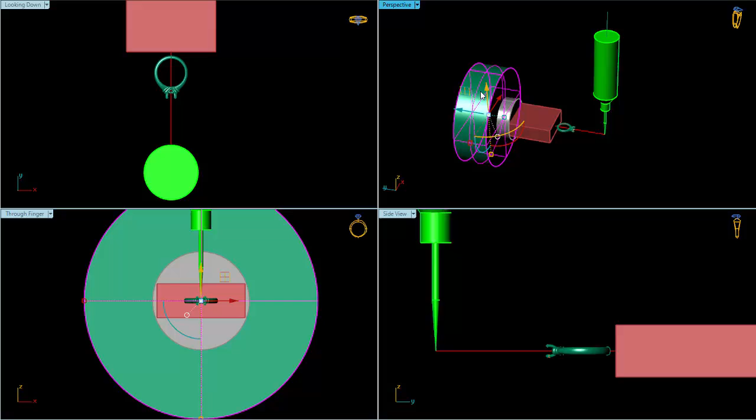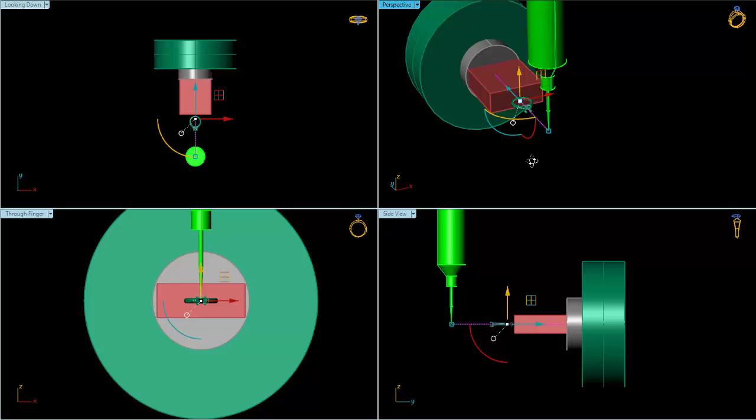Okay, so it's difficult to explain this in text in a post or without a visual aid. So if we say that that's the rotary table and we make some assumptions that it's 100% square to the bed, that it's centered over the cutter, if the cutter 0, X and Y is here, that it's centered and the offsets are lined up correctly. Alright, this being Z0 and Y0, and being sorted out properly.

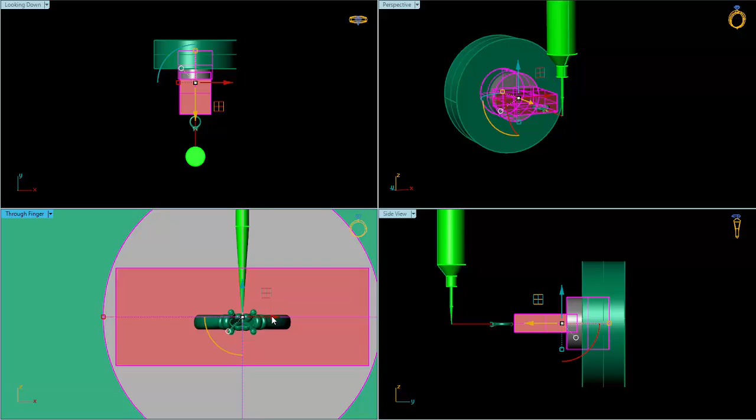Then this will always spin 100% true to itself no matter what. Okay, if that is true, then it doesn't really matter if your rotary teeth are not closing properly and this item is out by that much over there and that much over there, because if your Z is coming down to the same point each time, and we then grab both of these and we rotate them and we look at what happens to it in the flip, as long as the ring stays in the wax, the ring is still centered because the cutter is centered.

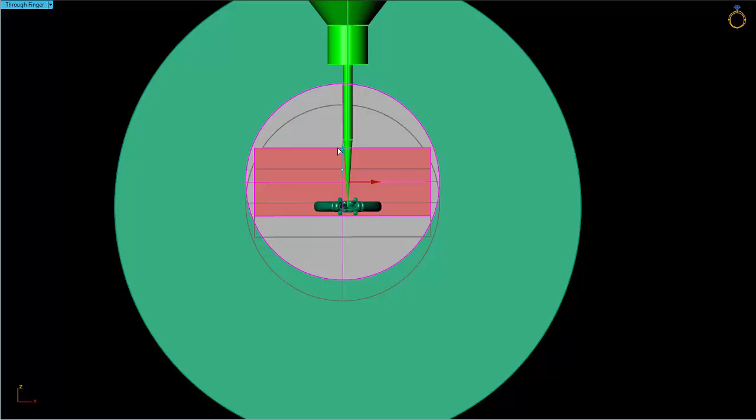Okay, so no matter what the offset is, you're still okay. You're still working within where you need to be. So in the flip, you're there. The only way for you to miss the flip is if this is so far out that you've gone out like 5, 6, 7 millimeters or more. So in this side you're making it, but when you're rolling, oops, sorry, got to roll the two together. When you're rolling, even in this case, you're making it. That's how far out you would have to be to miss it. The amount is extensive.

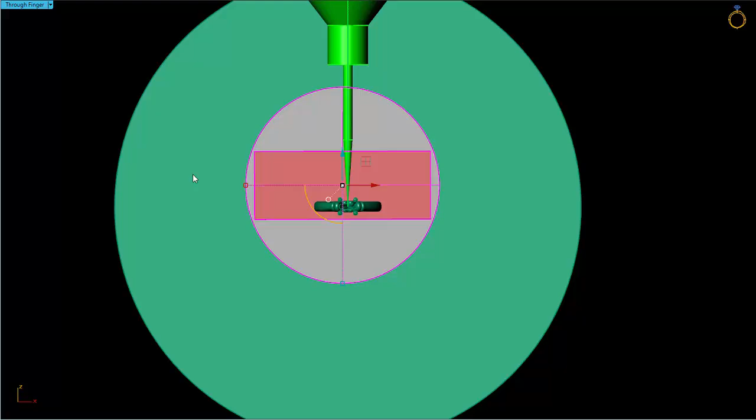It's not an issue. The problem comes in when you haven't dialed in your rotary over Y, you haven't got your Z perfectly centered, and in your Y you have yaw towards the left or the right hand side. Those are typically your biggest problems. If you have yaw in your Z and you're traveling away from it, then you would notice because your ring gets thicker or thinner over the part.

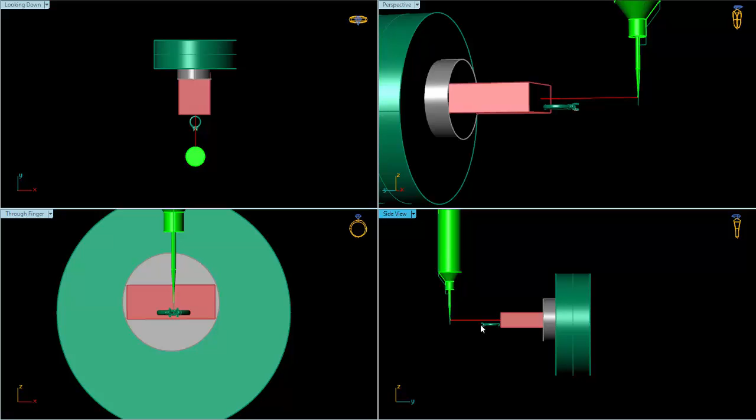But if the ring is staying a consistent thickness and you're just missing the top or the bottom, most likely it's going to be that you have a problem in your tool sensor position, testing too high, too low, and additionally having some other problem with your chuck being off center. Not sure if that's clear.